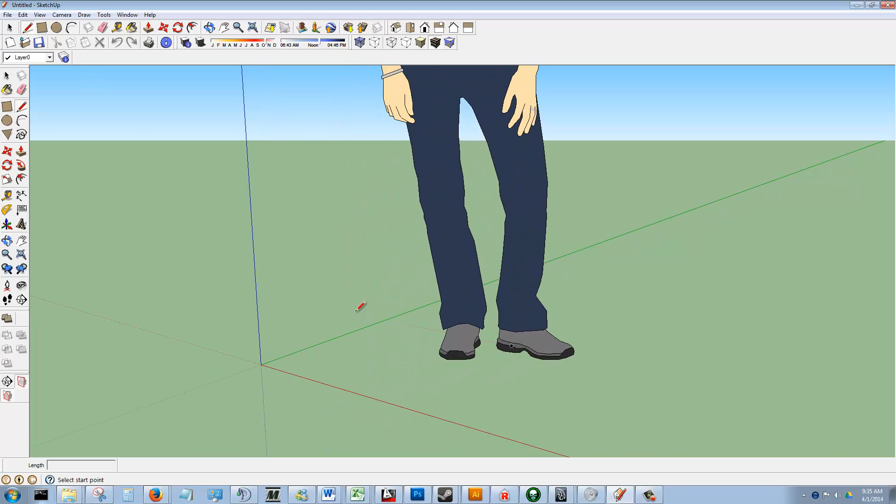And so we'll go about building this guitar pick holder. When I drag over here, you can see down the left hand corner some of the measurements. You can get an idea of scale. In fact, let's just open a new one. Anytime you open one, they put a human figure here for scale. This figure is somewhere around 5 foot 8 inches tall. So the scale that we're going to be building on is very small, right? So let's just erase this figure.

Now our guitar picks are roughly 1 inch wide, and they're just over an inch tall. This pick holder, we're going to have it staggered, much like a staircase, and it'll be able to hold 5 picks. So if we have 5 picks, 1 inch wide, we're going to want an extra 1/4 inch on each side, so that's 1.5 inches.

So instead of building that box, let's do this. Just build 1 inch, 1/2. Okay, let's see, 1.5 inches. Okay, there we go. By, make it a rectangle here, 3 inches long. Okay, so we have our plane here.

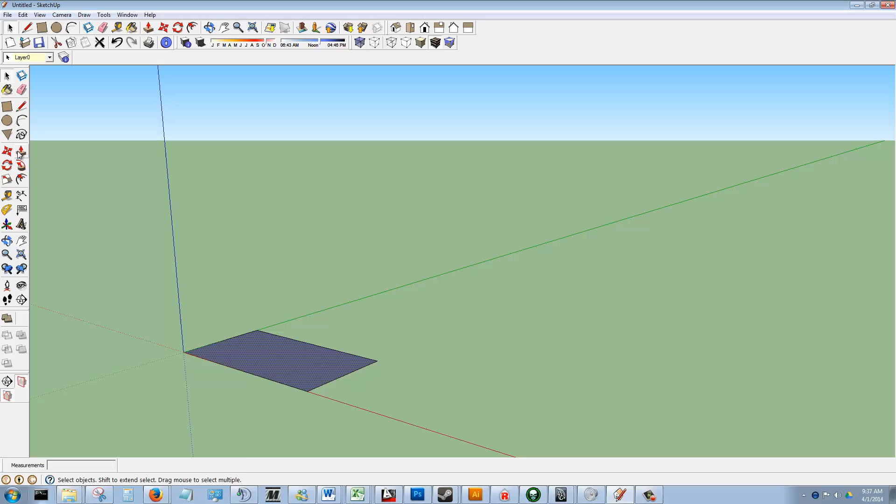Now if we hover over this, we see the push-pull, and this basically extrudes forms. So if our first pick is going to be 1 inch, and we want to stagger it at 1/4 inch times 5, the whole thing is going to be about 2.25 inches tall. So I'll just enter 2.25, and the default is inches. So we'll do that.

Okay, so we're going to pick this lengthwise edge. I'm going to right click and divide it into 5 picks. Let's see, 1, 2, 3, 4, 5, 5 segments. Okay, so now the pencil tool will snap to the endpoints and the midpoints, and it default snaps orthographically. Okay.

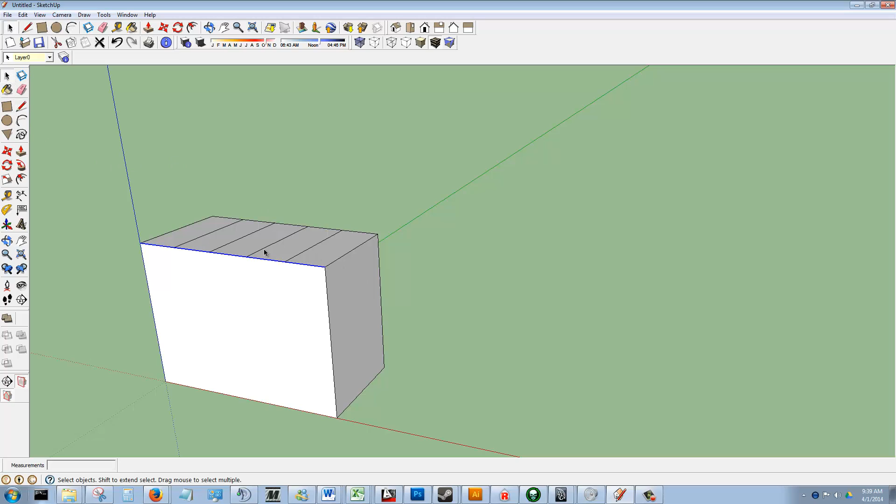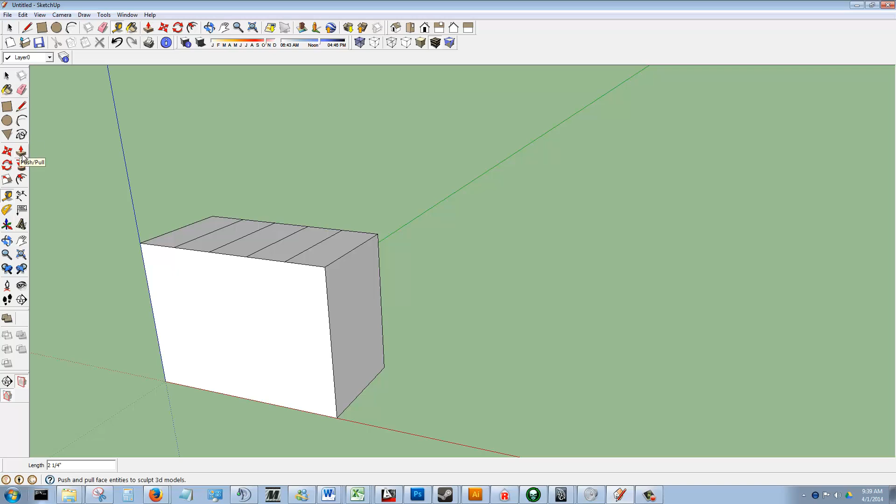So there are our 5 segments, and I know I just made it, but let's double check. That is 2.25. Okay, so our lowest piece is going to be 3/4 inch off the ground. So we want to take that to 1.5 downward, 5. And then we'll just use the snaps for the rest of these.

Okay, so within each of these, it's going to be another recess for each of the guitar picks, which I said are 1 inch wide, so that's 1.5 inches. So we want to come in a 1/4 inch on each side, but we also want to leave some play for the pick. So we'll come in 5/16 on each side. 5/16. Okay.

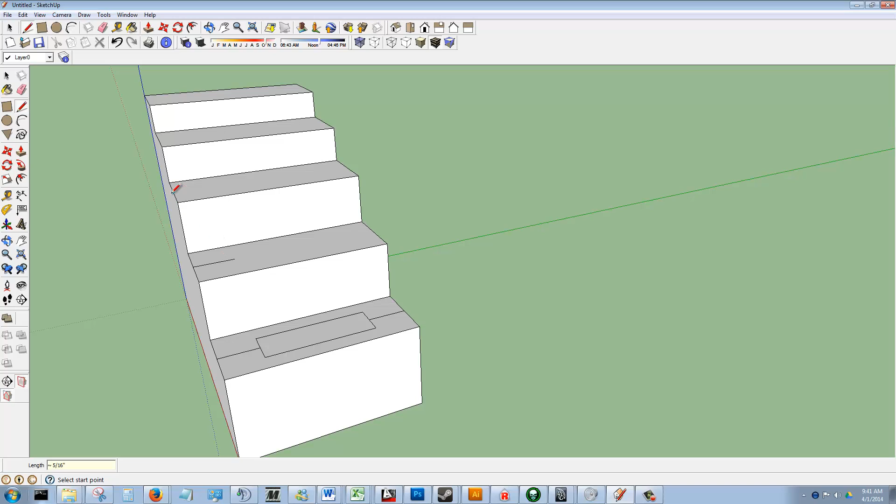Escape out of there. Again, come in 5/16. Escape to clear. And we'll repeat that process. And then come down the other side.

Okay, so I'm not picking up a snap, so let's just measure and see what that is. About 1/8. Well, let's just call it 1/8. The thing about SketchUp is, depending on what angle you're viewing it from, is what it's going to snap to. So if you're not getting exactly what you want, just rotate your camera angle. It has object snap tracking by default.

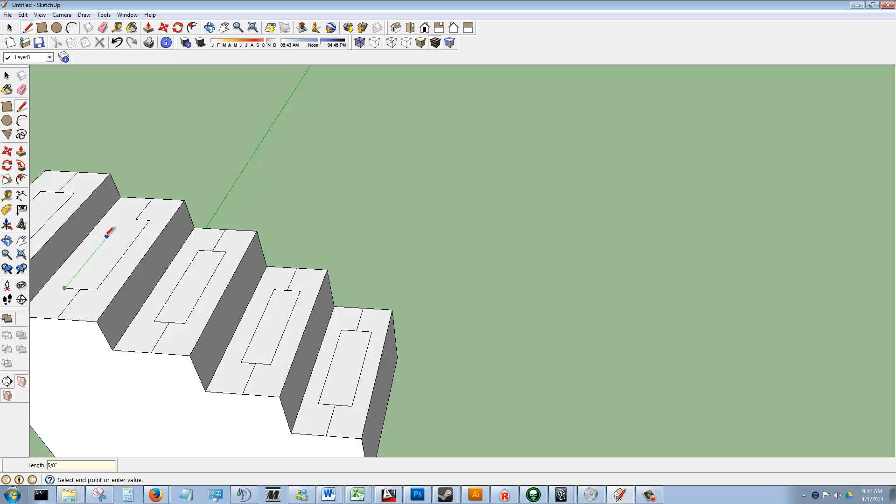And as you can see, I'm drawing a few lines here that are going off into space or going into the object. That's really not going to matter here. We'll see why shortly. So the picks are 1 inch tall, so I do want them to stick out so they come out above the plane so you can grab them easily with your fingers. So we're just going to go down 3/4 of an inch on all these.

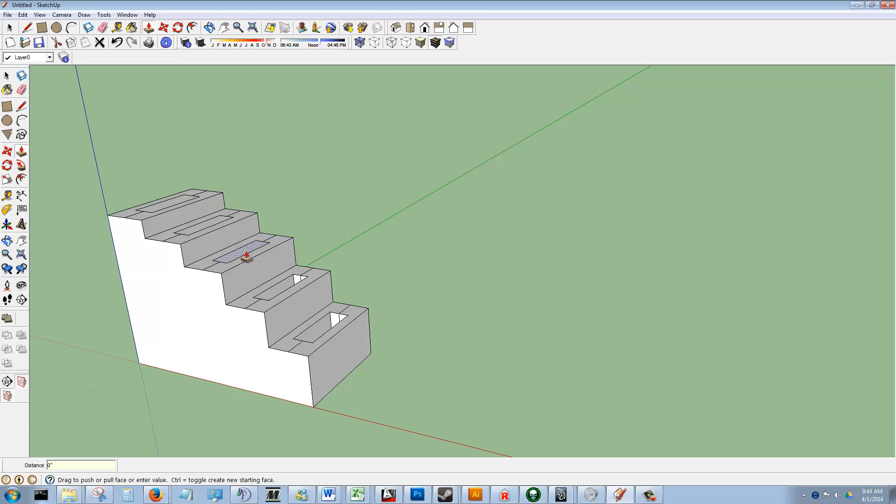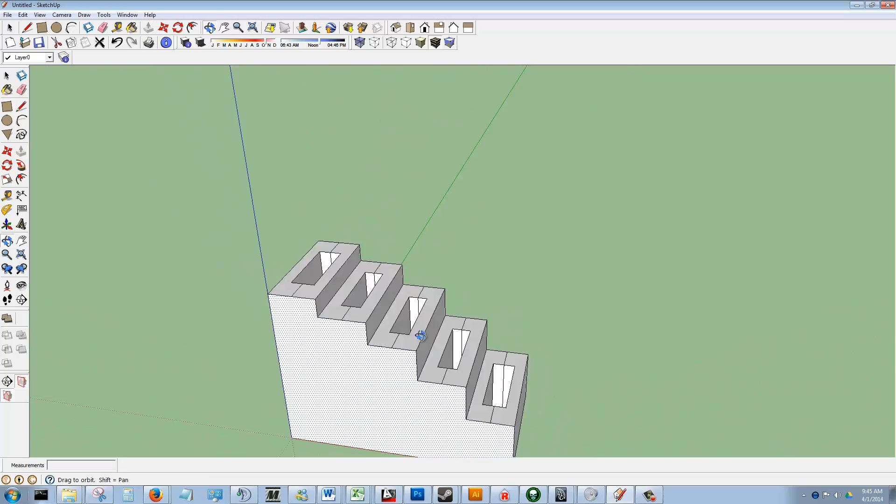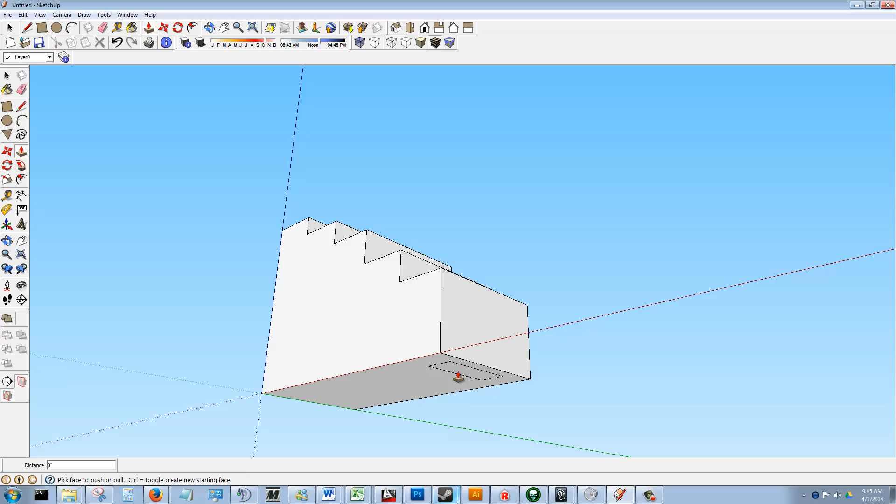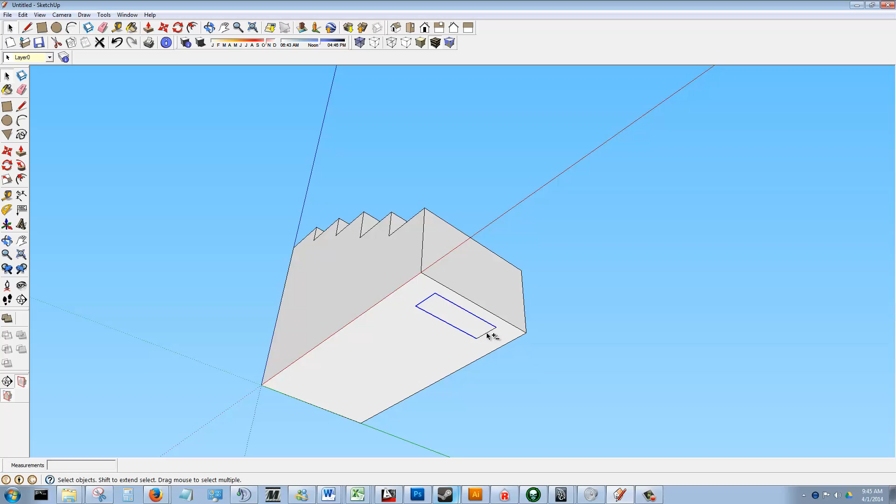Now you can see we have a recess here, so let's bring this up 1/8 and fill that back in. Let's bring this up 1/8, and then fill this in again here. It doesn't matter that these lines are here on the surface, we're building and printing 3D objects, but it's just for the sake of clarity there.

So there's our guitar pick stand. For the sake of this demonstration, I could make each one of these equidistant, but there's kind of a nice taper here, so I kind of like that. So we're gonna leave it like that.

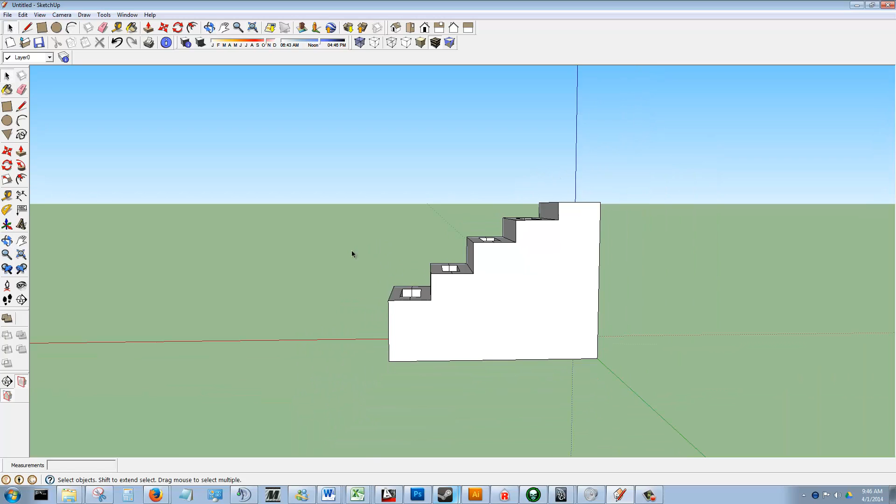So that is building an object in SketchUp. Let's just take down some quick measurements here. That's 3 inches long by 2 1/4 tall, and 1/8, 5/16 inch, and 1/8 wide.

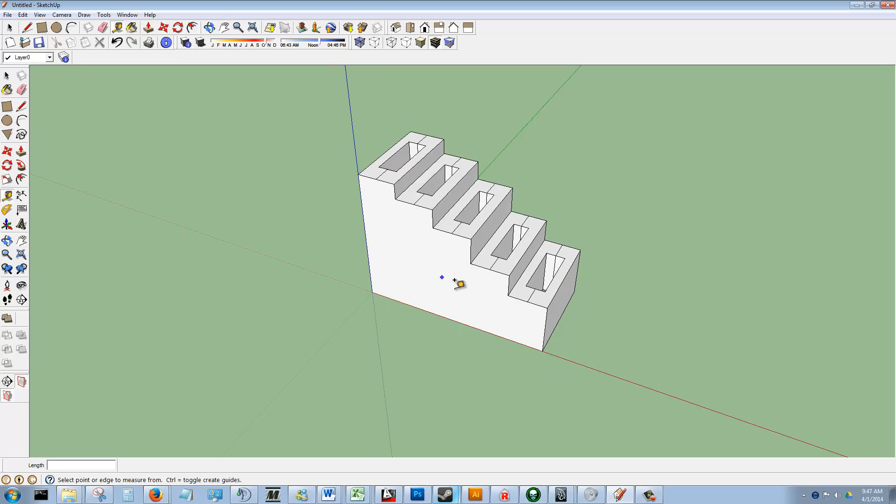So let's jump over to AutoCAD and build this same object. Let's set up our drawing units - units are inches, and decimal length. Let's go over to 16th precision, that's fine. So we're going to repeat that process in AutoCAD.

For a simple object, I believe SketchUp is a good, quick tool for the visual designer. We're going to see how AutoCAD is a bit more cumbersome, especially when we try to do something in 3D. So in AutoCAD, we're going to build these as modular sections and then join them. We just want to build one at a time to get my bearings straight.

Again, that was 1 1/2 wide, 5/16 inch, and 1/8 and 1/8, by 5/8, or around 5/8. So the whole thing was 3 inches, 3 inches divided by 5. Okay, let's get to the polyline.

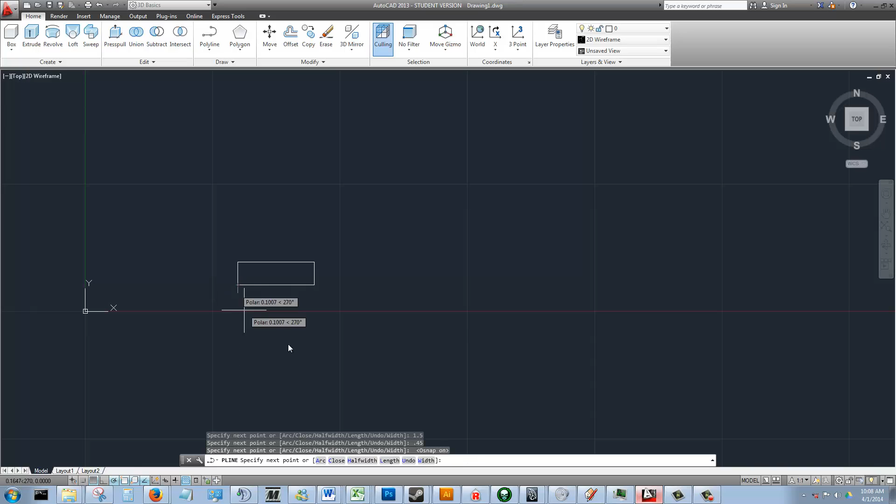And now we're going to extrude this up, and each one was extruded up about 7/8, so 7/8.

Now we need to create the depression, the insert. So that was 5/16, 1/8, 1/8, and it should be snapping to the midpoint here.

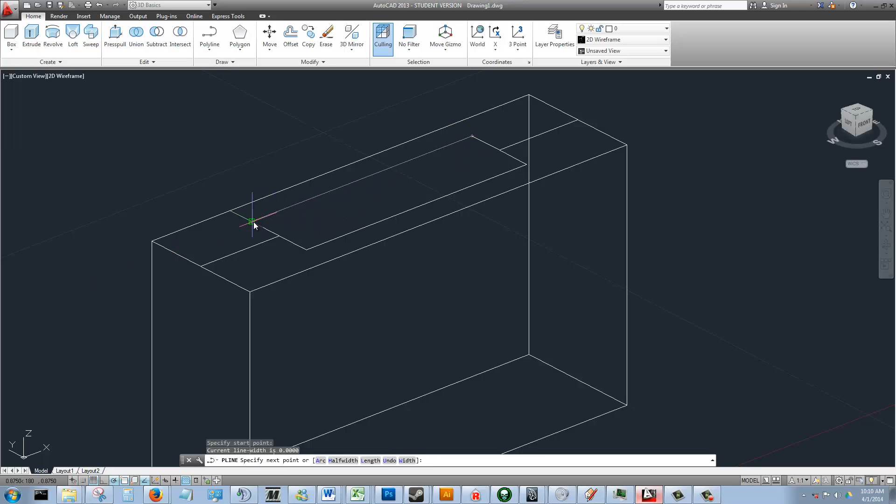Just explode those and explode those, and now we can just join the other parts. We are going to need to do some cleanup work here - I'll erase those. So let's take a look here at what we got.

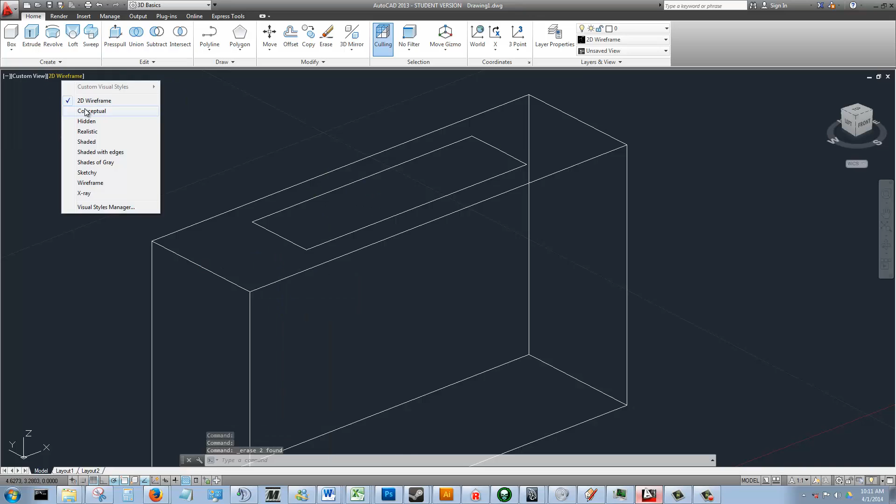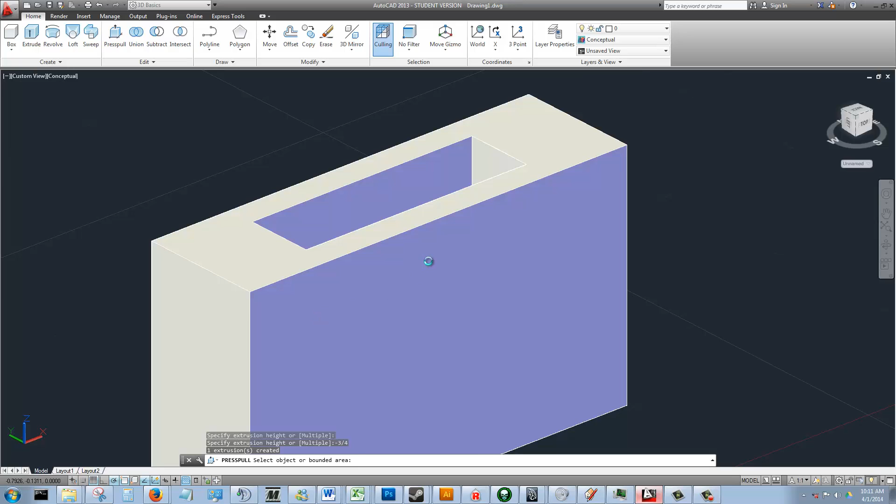Now the press pull function here is similar, only it doesn't always like to work as well as what we saw in SketchUp. So we'll go down 3/4. It went up 3/4 - yeah, we don't want that. Let's try that again. Let's try -3/4. There we go.

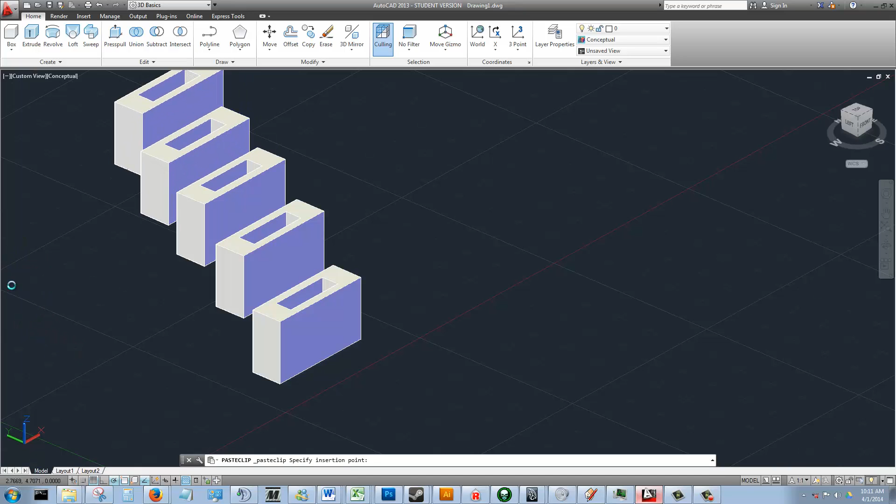So let's just copy, paste, -5. Then we can move these, snap from that corner to that corner.

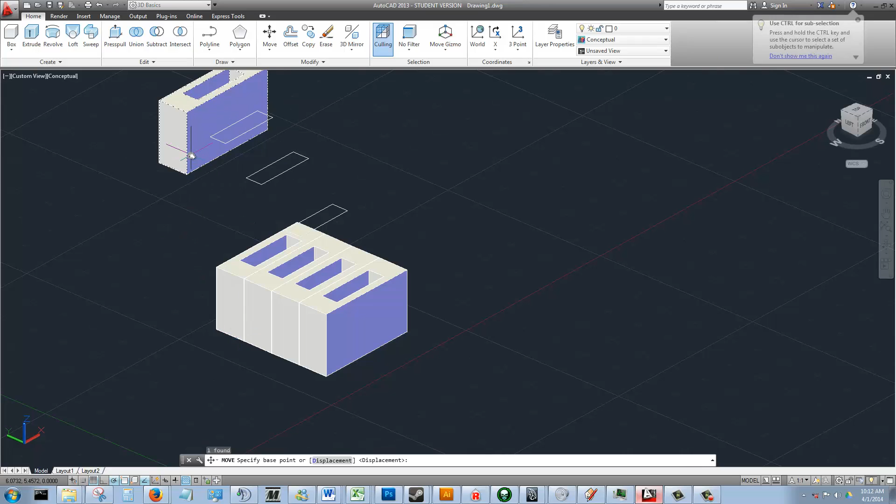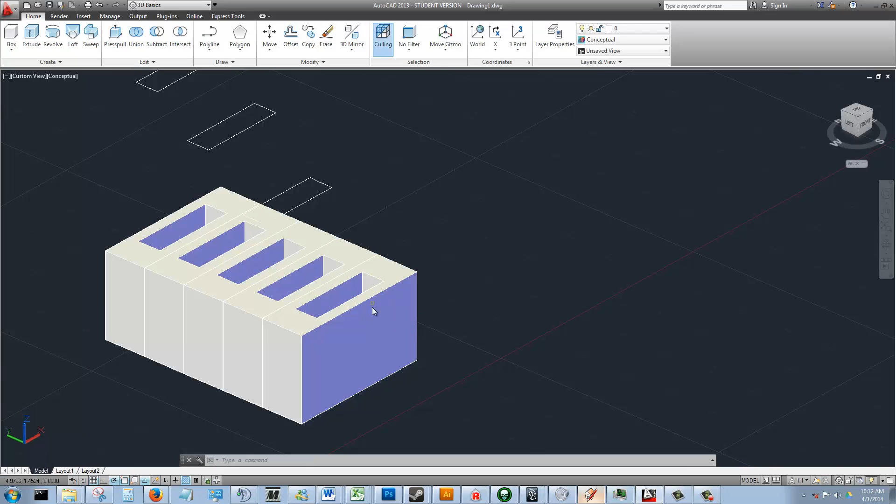And now the relative distance was 3/8, longer. Okay, so we'll do it exact - so this one was 3/8.

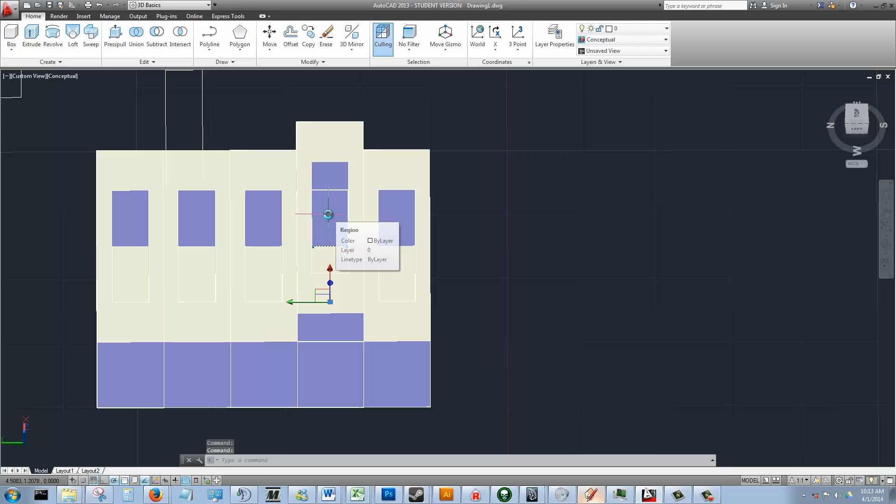Let's see if we can do this here. Extrude 3/8. And we're also, for each time we extrude that, going to have to bring up the bottom layer, 3/8. Okay, that's coming along nice.

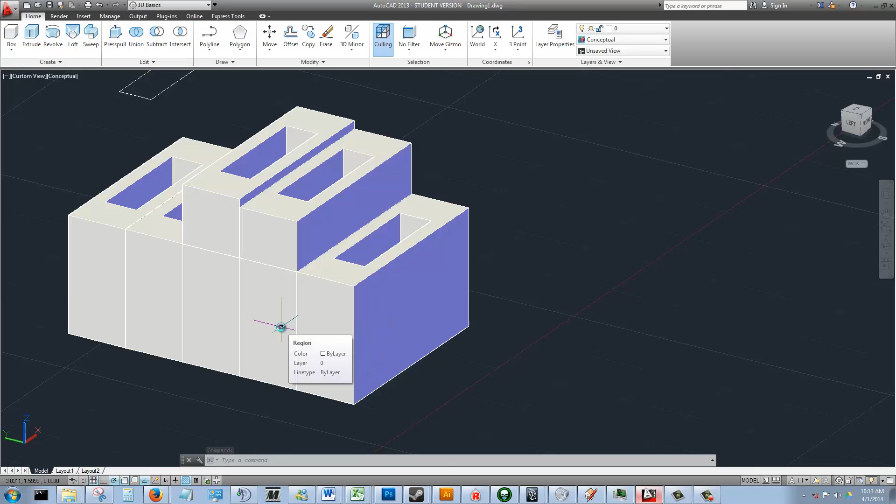And this one, 7/16. That doesn't look right, what did we do wrong? That's 3/8, that's 7/16 - we need to do 7/16 plus 3/8. Okay, so we went up, so let's go up 3/8 now.

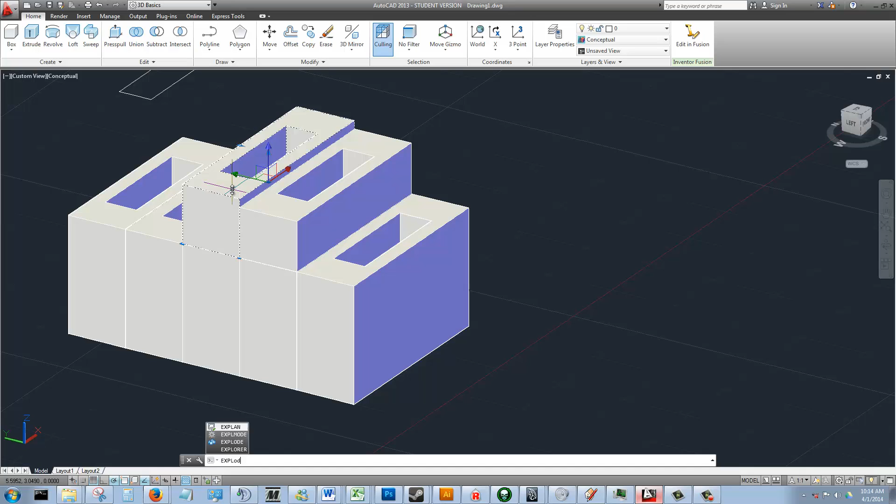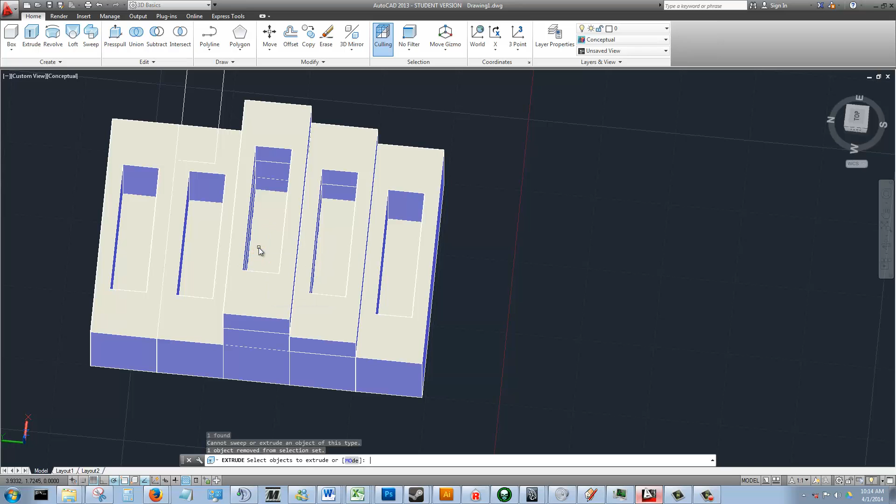There we go. And we need to take this up to the next one, so it's at that level, up 1 1/8. There we go.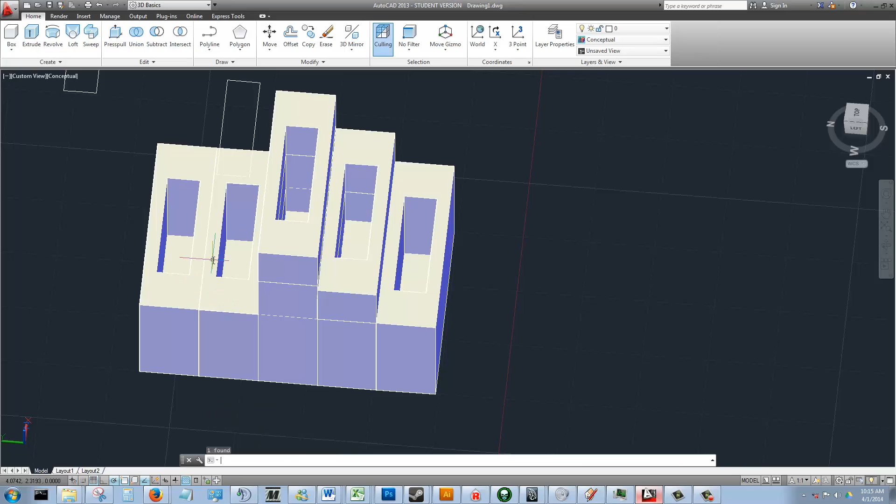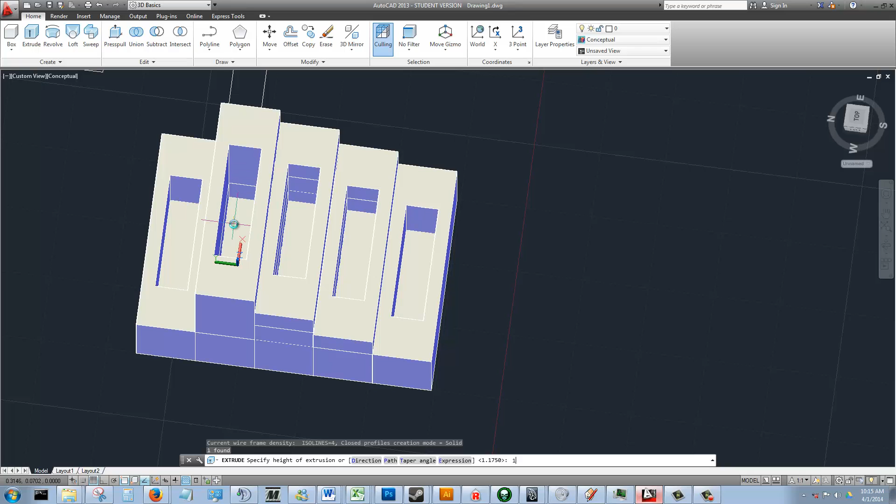Extrude 1 1/8. Same for bottom, 1 1/8. And then for the last piece.

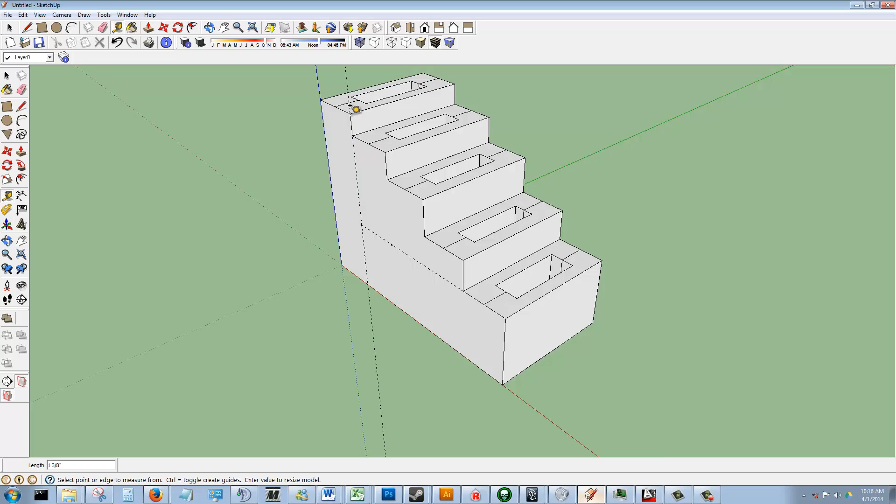And 1 3/8, 1.375. Well, that's not 1.375, let's try that again. There we go.

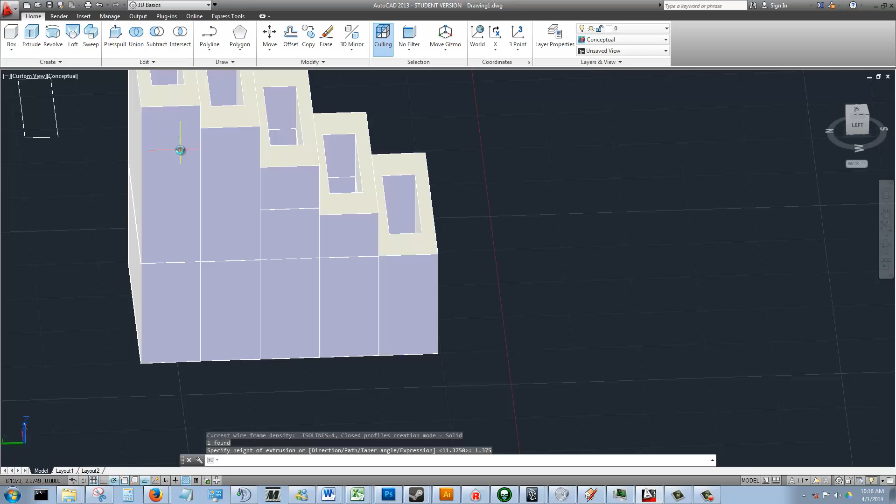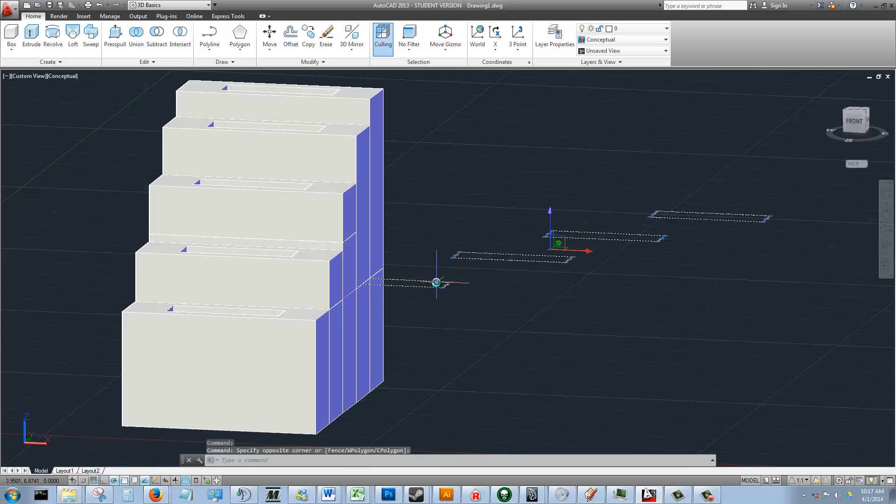And bring the bottom up, 1.375. Okay, that wasn't so bad. Let's delete some of this, and let's union all of this.

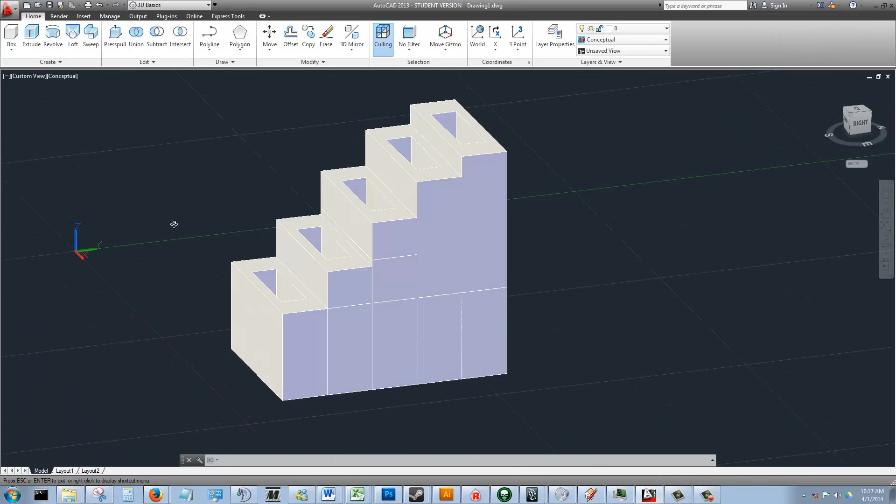Okay, alright. So now we've got our piece built in SketchUp, and we've got our piece built in AutoCAD.